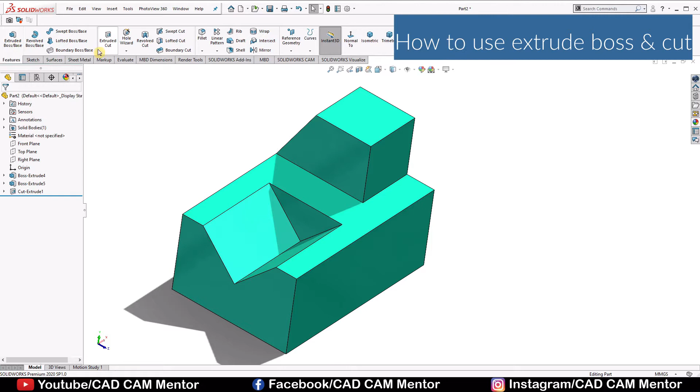Hello everyone, in today's tutorial we will learn how to use extrude boss base and extrude cut to make this isometric block. Along with that we will see how to select material for this block and how to apply and edit the color. So let's get started.

When you open SolidWorks, select new, select part, click OK. Now we'll change this IPS to millimeter gram seconds.

So these are the dimensions for our block. We'll make this rectangular block first. Height is 64 mm, length is 150 and the width is 100 mm.

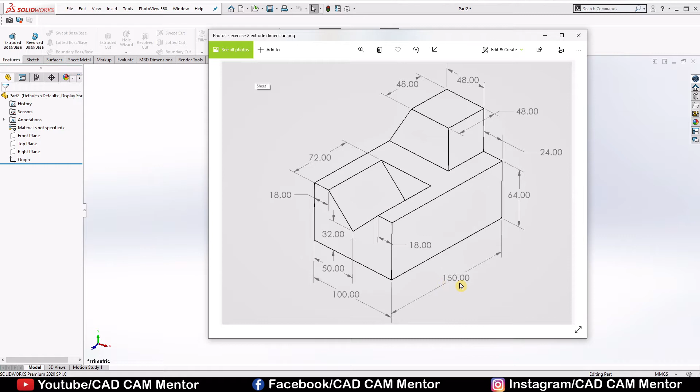Now here select top plane, select sketch. Click on the small arrow besides of rectangle and we'll select here center rectangle. We'll draw one rectangle here. Click OK. Now we'll give dimensions to this rectangle.

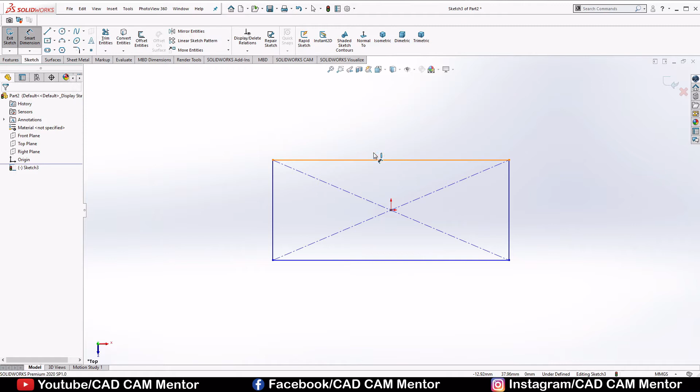You can select smart dimension from here as well, or else you can select a short key. Hold your right key of mouse and drag your mouse upward to select smart dimension. Now select this line. Our length was 150. Click OK. Again select this line and the width was 100. Click OK.

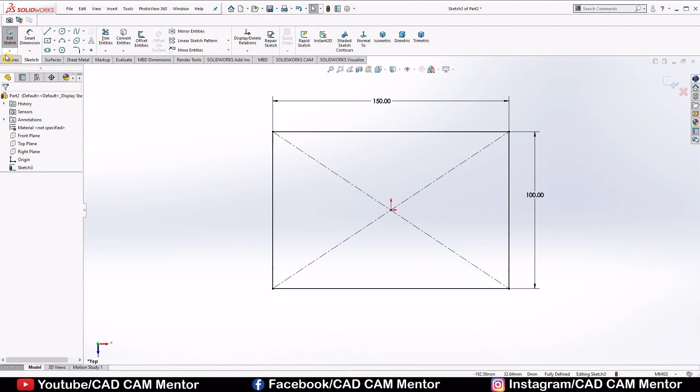Now the sketch is fully defined. Go to the features. Select extrude boss base. Now we'll put here height of the block 64 mm and click OK. So this is our simple rectangular block.

Now we'll make this portion. This square is 48 by 48 and height is also 48 and this length is 24.

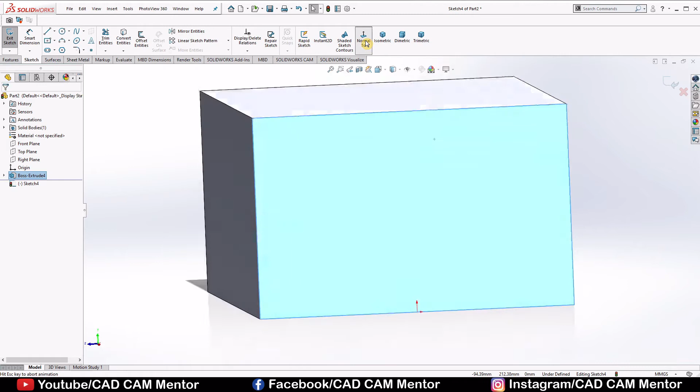So right click on this surface, select sketch, select normal to. Now we'll select line. You can select line from here as well, or else you can use short key. Now we'll draw that shape. Click OK here.

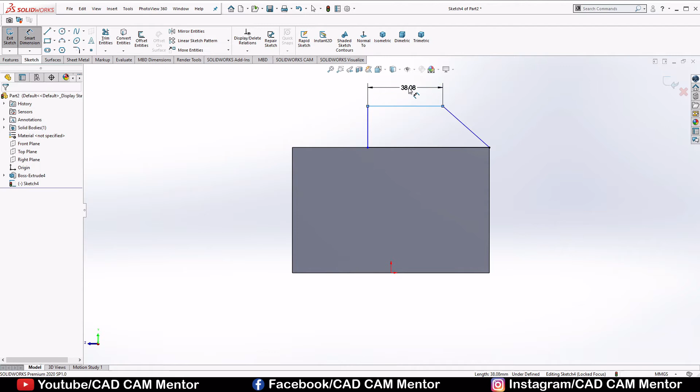Again select smart dimension. This length was 48. Height also 48. And the distance from this edge to this line is 24.

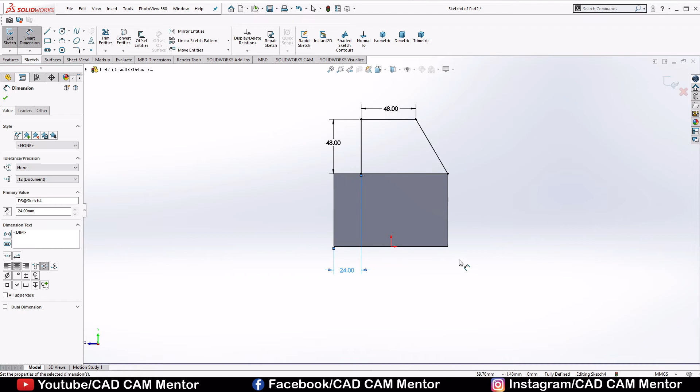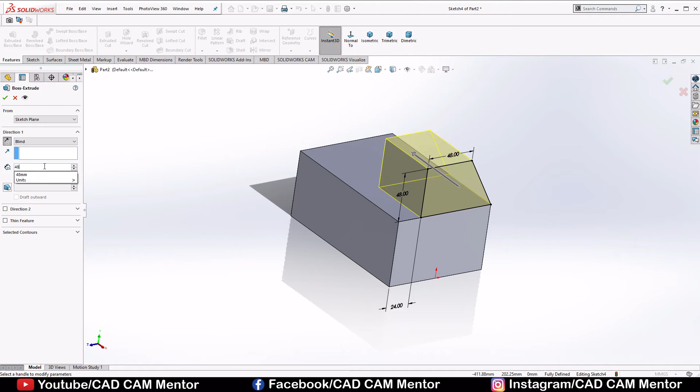Now the sketch is fully defined. Again go to the features. Select extruded boss base. We don't want this block outside like this. To change the direction, click on this box of reverse direction. Now we'll put here length of the block 48 and click OK.

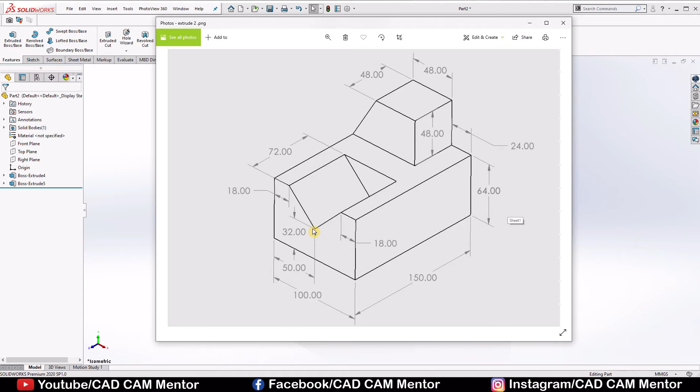Now we'll cut this triangular portion. The length is 72. This length is 18. This is also 18. The distance from this edge to this point is 32 and this edge to this point is 50.

Right click on this surface, select sketch and select normal to. Again select line. We'll draw one rectangle here. Click OK.

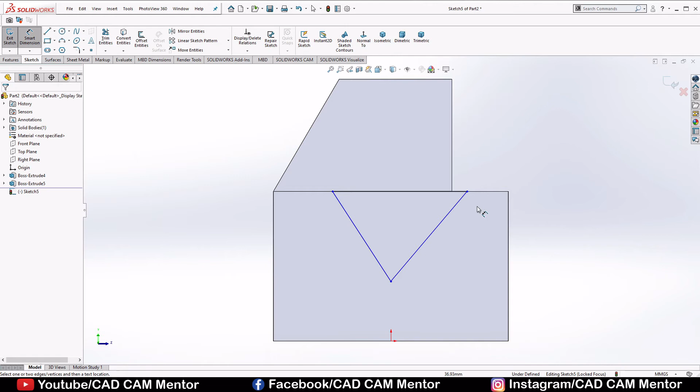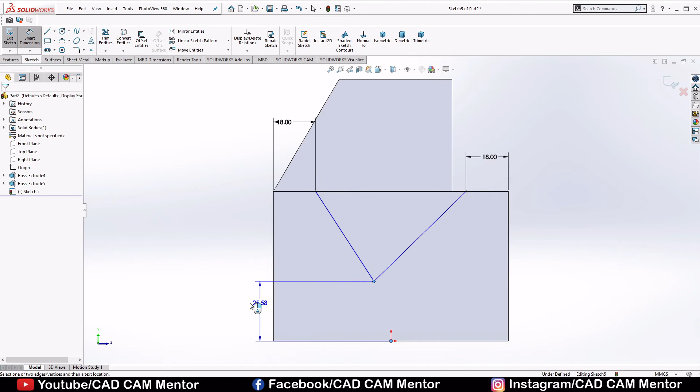This distance was 18 mm. This is also 18 mm. This distance was 32. And distance from this edge to this point was 50. Now the sketch is fully defined.

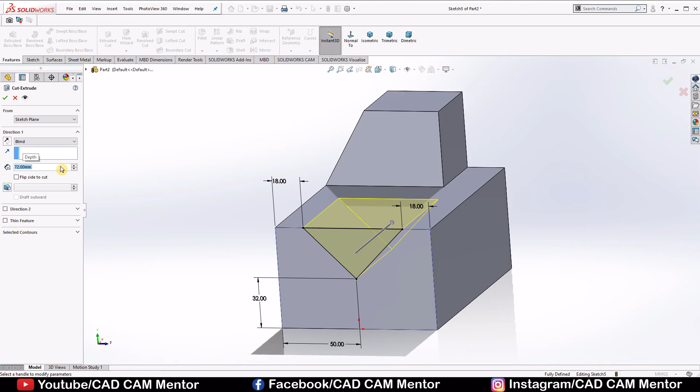Again go to the features. Here select extruded cut. We'll put here length 72 mm. And click OK.

Now we'll see how to select material for this block. Go to the appearance, select metal, select any material you want. For now we select this chrome.

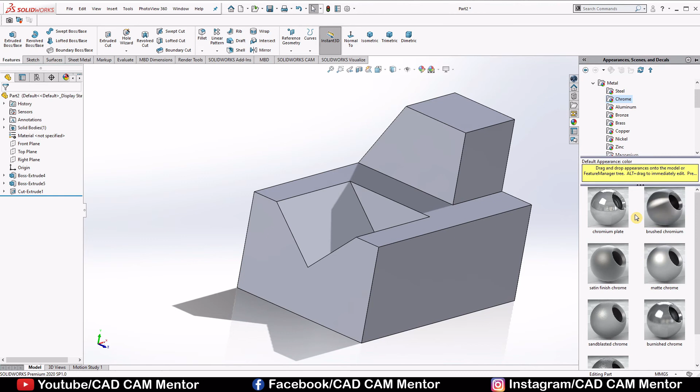Here we have so many options. For now we'll select this chromium plate. Drag this chromium plate, drop on the block and select body.

To change the background, select the small arrow besides of apply scene and select any background you want.

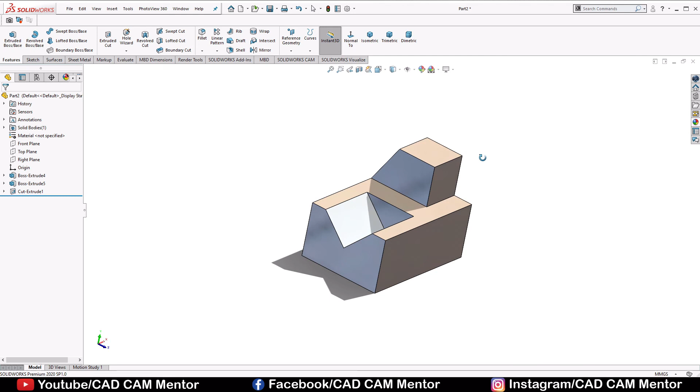Now we'll see how to apply color and edit the color. Go to the edit appearance. Select any color you want. Here we have to select reference. So we'll select bodies and here click on the block.

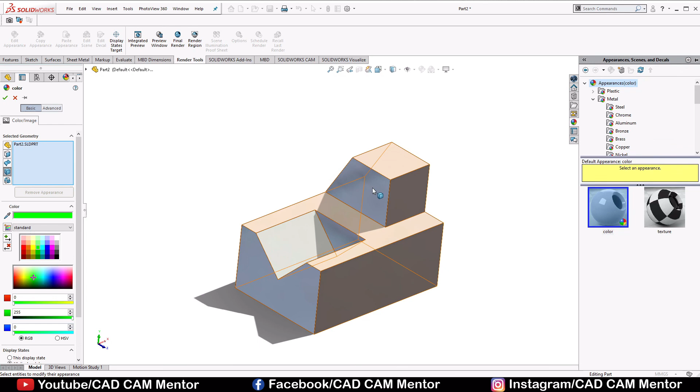You can adjust the color as well. And click OK.

So this is our isometric block. We have learned how to use extrude boss base and extrude cut. Try to make it, and if you have any query, ask in the comment section.